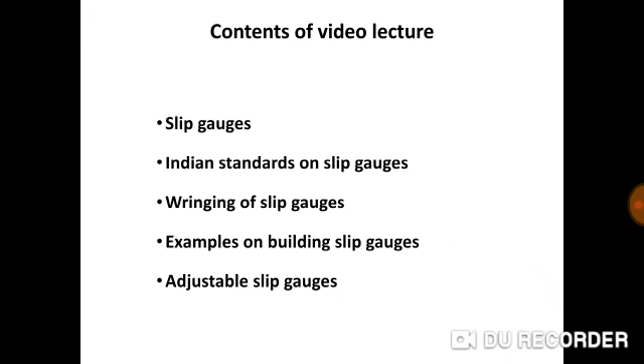Today, let us discuss slip gauges. The content of this video lecture consists of details of slip gauges, Indian standards on slip gauges, wringing of slip gauges, an example on building up of slip gauges, and adjustable slip gauges.

Slip gauge blocks. What is it? The slip gauges or gauge blocks are the universally accepted standard of length in almost all mechanical based industries. They are the working standard of linear dimension. They are used for three main purposes: for direct precise measurement, where the accuracy of the workpiece calls for it; for use with high magnification comparators to establish the size; and for calibration of micrometers or vernier calipers.

The slip gauges were first developed by engineer Mr. Johansson, and hence they are known as Johansson gauge blocks or simply Jo blocks. These are rectangular blocks of steel having a dimension of 32 mm by 9 mm with appropriate thickness or length. A gauge block is a block of metal or ceramic with two opposing faces ground precisely flat and parallel, a precise distance apart.

Standard gauge blocks are made of hardened steel or alloy steel, while calibration grade blocks are often made of chromium based alloys or tungsten carbide, since the wear resistance of these materials is superior. In general, slip gauges are calibrated using calibration grade slip gauge blocks by direct comparison using a Brooks level comparator or interferometric methods.

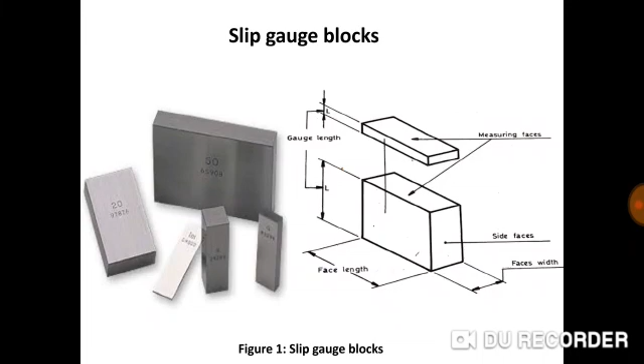Now, Indian standards on slip gauges. IS 2984 1966. The slip gauges are the universally accepted standard of length. According to IS 2984 1966 2013, the slip gauges are graded based on accuracy into 5 groups, that is calibration grade, grade 00, grade 0, grade I, and grade II. As per IS 2984 1966 2013, geometrical product specification in length standard gauge blocks by the Bureau of Indian Standards is available. Since slip gauges are used globally, they are manufactured in millimeters as well as inches as per IS, BS and DIN standards.

Indication of units. Whether in millimeters or inches, the letter M or E is used, M for metric units and E for inches. The number of pieces in a set is mentioned following the letter M or E. For example, M112 means gauge blocks in metric units, 112 in number. The most useful sets available in metric are M112, M105, M87, M50, M45, M33 and M27. Similarly, in inches, E81, E49, E41, E35 and E28.

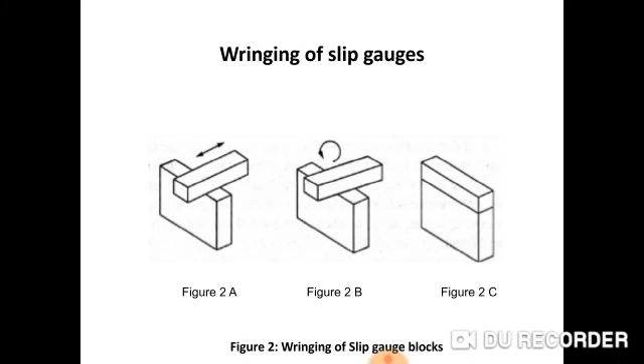Method of wringing. Start wringing the largest size first. Place two slip gauge faces together at right angles as shown in figure 2a. Then with little pressure twist through 90° as shown in figure 2b. This action should be smooth with constant pressure till attaining an equivalent plane, or both slips are built on the same axis. When the largest gauge blocks have been rung, follow the same process in descending order of dimension of the slip gauge blocks.

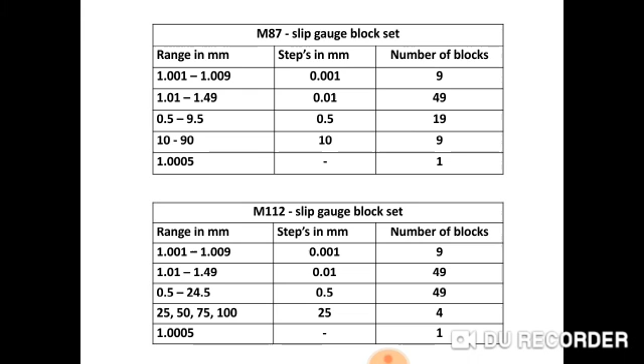The M87 set and M112 set are taken for today's examples. M87 set, as the name says, M for metric, 87 for 87 slip gauges. Similarly, M112 means M for metric, 112 for the number of slip gauge blocks available in the set.

Now, example 1. Building of slip gauges. List the slip gauge blocks to be wrung together to produce an overall dimension of 92.3575 mm using two protection slip gauge blocks of 2.5 mm. I repeat, the protection gauge blocks of 2.5 mm size are to be used. Draw the slip gauge block combination using the M112 slip gauge block set.

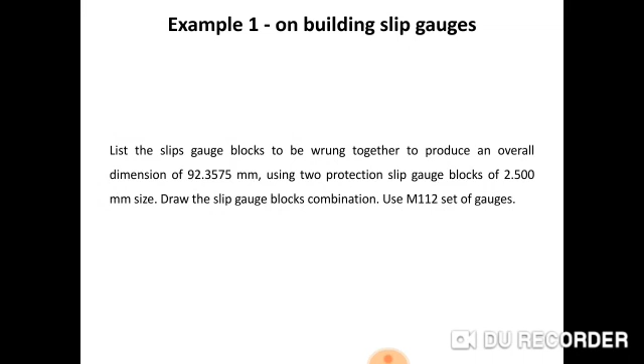That means, in addition to 112 slip gauges, two protection blocks are provided in a set. What is it? Apart from the number of slip gauges mentioned, two extra gauges of 2.5 mm each are also supplied as protective slips in the set. The purpose of protective slips is to prolong the life of slip gauges. These are often made of more wear resistant materials like tungsten carbide. The protective slips are identified by the letter P marked on the face of the slip gauge. These are placed at each end of the assembled slip gauge blocks as shown in the diagram.

And to ensure lower wear and increased usage of slip gauges, the use of protector blocks at each end of the slip pile will extend the accuracy and hence the useful life of the slip gauges or gauge blocks. But there is a disadvantage associated with the use of protector slip gauge blocks, since the minimum number of gauges, which was supposed to be 5, has now become 7 here.

Let us start building of slip gauges. The dimension to be built is 92.3575 mm less 2 protector blocks of 2.5 mm each. Subtracting that dimension, you will get 87.3575 mm. Always start with the last decimal place from the remainder, that is 87.3575 mm. Subtract 1.0005 mm, that is the last decimal place 0005 plus 1 mm, so minus 1.0005 mm. By subtracting it, the remainder becomes 86.357 mm.

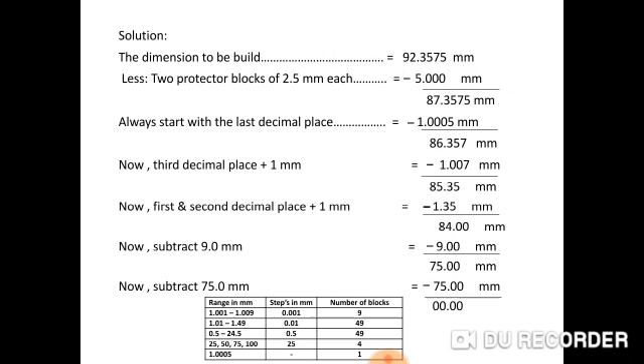You may ask why 2 protector blocks are selected. The rule in building slip gauges is that one size slip can be used only once. If so, why is the protector block used 2 times? The reason is that the very purpose of the protector block is to protect the slip gauges from wear due to repeated usage. Hence it should be used on both sides in order to protect the other slip gauge blocks, and it is provided as 1 mm 2 numbers, 1.5 mm 2 numbers, 2 mm 2 numbers and 2.5 mm 2 numbers in every set, depending upon the required blocks. In this set, 2.5 mm 2 numbers are provided. In addition to 112 numbers, 2 protector blocks are provided in every set.

The diagram shows 7 slip gauges are used. On both sides, P is marked for the protector blocks of 2.5 mm. Then wringing should be started from the larger size. So 75 and 9 are joined first. Similarly, 75, 9, 1.35, 1.007, 1.0005 and 2 protector blocks are built together in order to have 92.3575 mm.

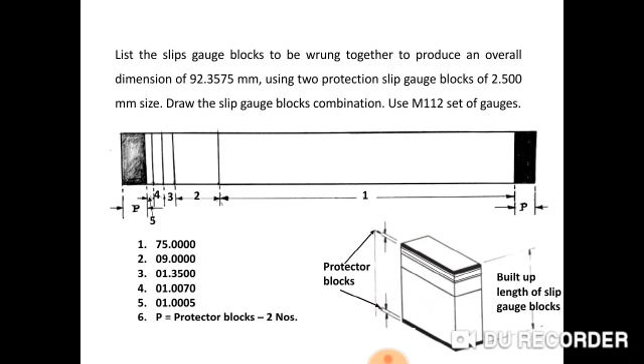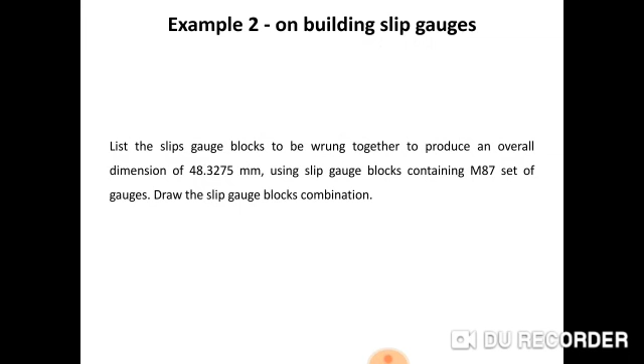Example 2 on building slip gauges. List the slip gauge blocks to be wrung together to produce an overall dimension of 48.3275 mm using a slip gauge box containing the M87 set. Draw the slip gauge block combination. M87 set means metric 87 numbers set. Now, the dimension to be built is 48.3275 mm. Always start with the last decimal place, that is 1.0005 mm, which is available in the M87 set. One number is used, so the remainder is

47.327 mm. Now the third decimal place is 7, that is 1.007, which is available in 1.001 to 1.009. So subtracting 1.007 mm, we get 46.320 mm as remainder. Now the first and second decimal places plus 1 mm will be subtracted, that is 1.32 mm. In the 1.01 to 1.49 mm range in steps of 0.01 mm, 1.32 mm is available. So minus 1.32 mm, the remainder is 45 mm.

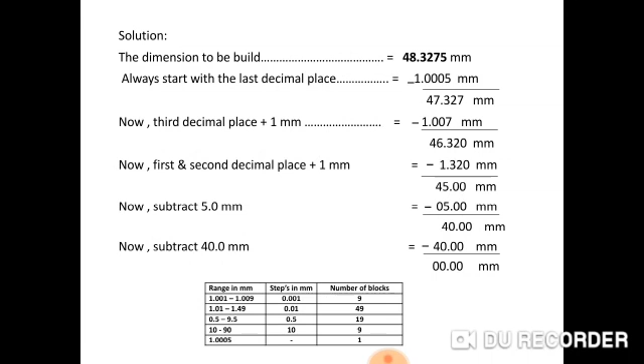Now since the slip gauges are available in 10, 20, 30, 40, 50 mm and so on up to 90 mm, we cannot subtract 45. So from 0.5 to 9.5 mm in steps of 0.5 mm, 0.5, 1, 1.5, 2, 2.5, 3, 3.5, 4, 4.5, 5 are available. So from 0.5 to 9.5 mm, 19 gauges are available. Among them, 5 mm is subtracted, so the remainder is 40 mm. The 40 mm gauge block is available. By subtracting that, the remainder becomes 0.

And these are wrung together in order to obtain the desired length of 48.3275 mm by wringing the larger sizes 40 and 5 mm together first, following the wringing procedure. Thereafter 1.32 is added, then 1.007 and finally 1.0005 mm. But before wringing, all slip gauges should be cleaned thoroughly using ethanol or any petroleum product.